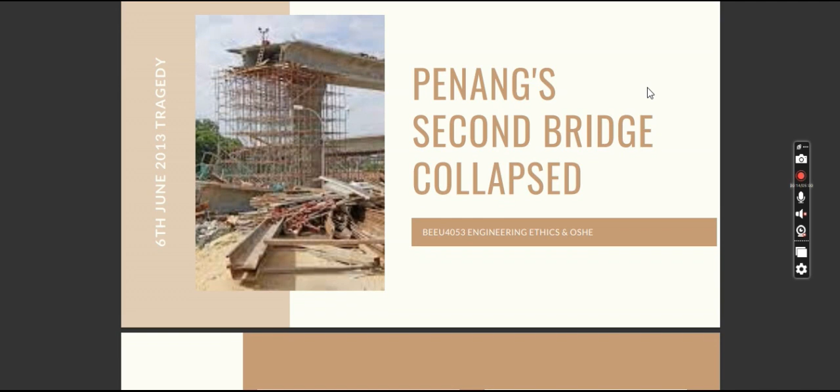B0819103220. In this video, we're gonna present on the Penang Second Bridge collapse for the subject BEEU 4053 Engineering Ethics and OSHE. Introducing my fellow team members: Muhammad Firdaus bin Jamaluddin, Azim Hamzi bin Azhar, Muhammad Alif Afif bin Muhammad, and Nur Zahira binti Ades.

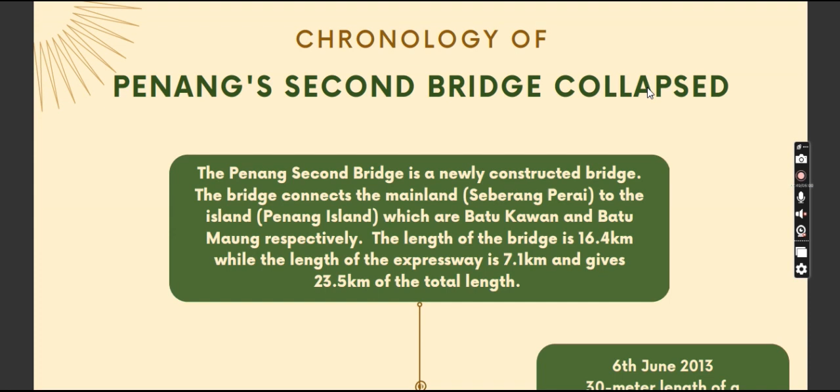Chronology of the Penang Second Bridge collapse. The Penang Second Bridge is a newly constructed bridge. The bridge connects the mainland Seberang Perai to Penang Island, at Batu Kawan and Batu Maung respectively. The length of the bridge is 16.4 kilometers, while the length of the expressway is 7.1 kilometers, giving 23.5 kilometers of total length.

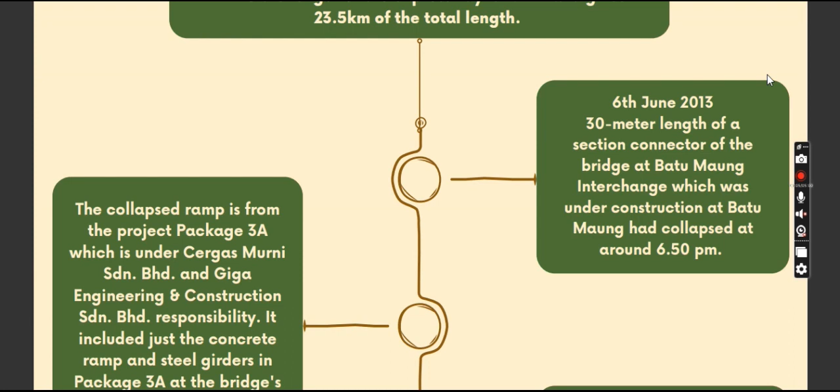On 6 June 2013, a 30-meter section connector of the bridge at the Batu Maung interchange, which was under construction, collapsed at around 6:50 p.m. The collapse is from project package 3A, which is under Cergas Murni Sdn Bhd and Giga Engineering Construction Sdn Bhd responsibility. It included the concrete ramp and the steel girders in package 3A at the bridge departure route to the island roadway.

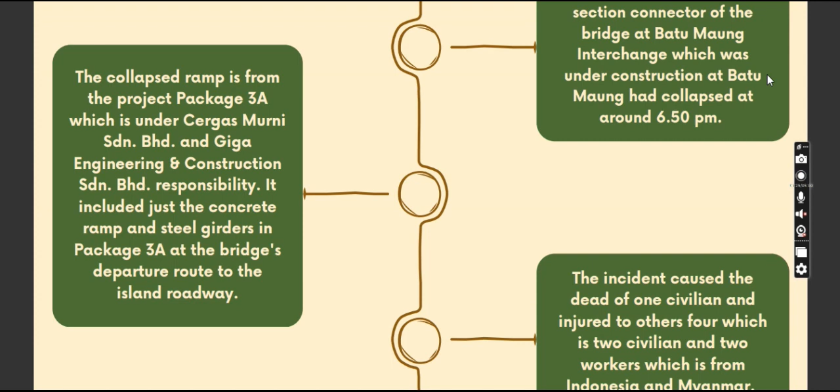The incident caused the death of 1 civilian and injured 4 others, which is 2 civilians and 2 workers from Indonesia and Myanmar. Penang Director Muhammad Ahmad said that early investigation by his team found that failure of the formwork support was the cause of the collapse of the ramp.

So, Cergas Murni was charged under section 17(1) of the Occupational Safety and Health Act 1994, for the death of former policeman Tajudin Zainal Abidin and injuries to 2 civilians, Thilasheni Rajendran, 25, and Gajashantini Gajanujan, 25. Section 17(1) of the Act says that it shall be the duty of every employer and every self-employed person to conduct his undertaking in such a manner to ensure, so far as is practicable, that he and other persons not being his employees who may be affected thereby are not thereby exposed to risk to their safety or health.

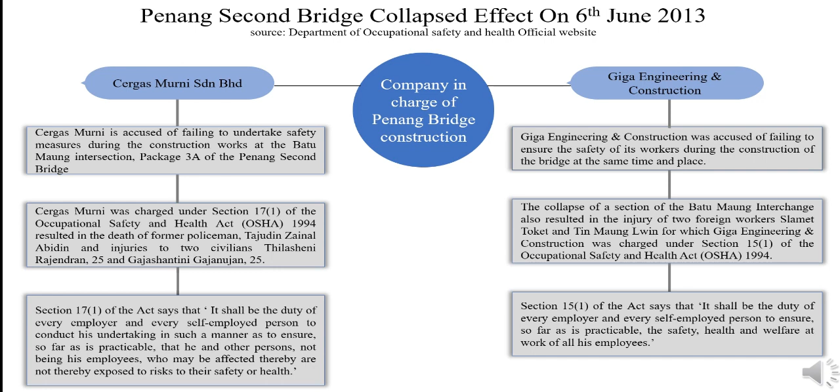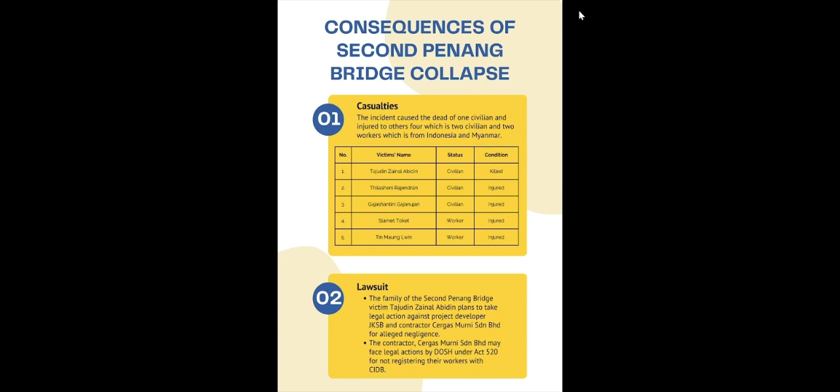Next, lawsuit. The family of the second Penang Bridge victim, Tajudin Zainal Abidin, plans to take legal action against project developer JKSB and contractor Cergas Murni Sdn Berhad for alleged negligence. The contractor Cergas Murni Sdn Berhad may face legal action by DOSH under Act 520 for not registering their workers with CIDB.

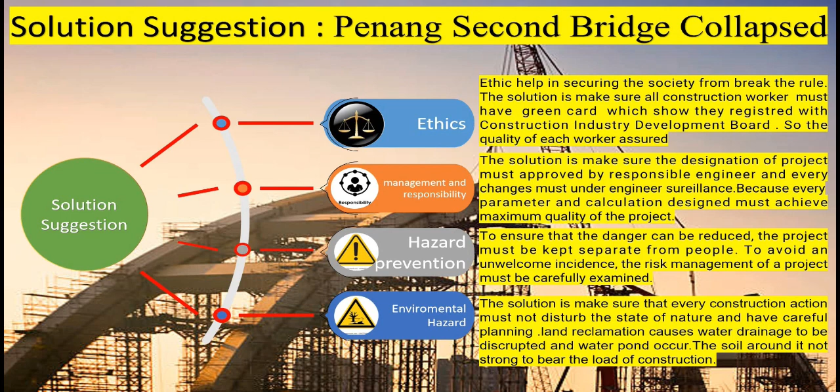The last one, in terms of environmental hazard, the solution is to make sure that every construction action does not disturb the state of nature and has careful planning. Land reclamation caused water drainage to be disrupted and water ponding to occur. The soil around it is not strong enough to bear the load of construction.

To fulfill the sustainable development concept through the construction of the second Penang Bridge, certain stages need to be considered, from planning until construction. In the planning stage, it is necessary to conduct research on alignment to consider how it can foster socio-economic growth and contribute to a balanced level of development throughout the state of Penang.

In the design stage, to lessen the time spent at sea and the potential for harming or polluting the marine environment, the bridge sections made use of IBS and were fabricated on land. Lastly, in the construction stage, an impartial environmental impact assessment consultant is required to carry out an environmental monitoring audit, with assessment of the impact on marine and fishery resources, including the aquatic environment and aquaculture.